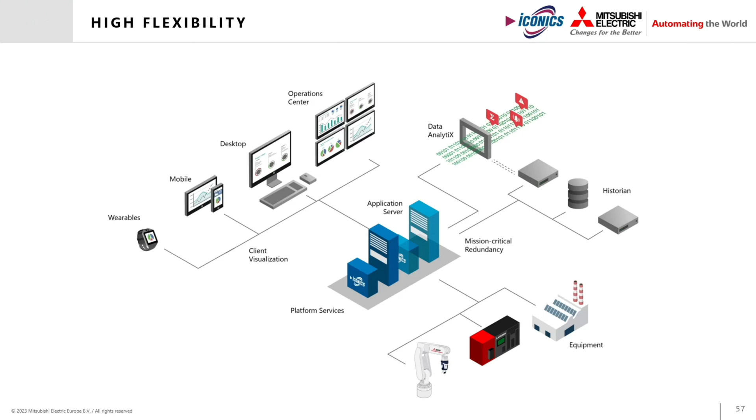We start calculating, we start doing some research, some analytics on those by defined rules, and then you see that on the top, we publish that information based on your self-defined rules and create value to your process by visualizing the information within a dashboard.

But let me use this graphic real quick because I want to introduce you to all kinds of possible spots where AI could happen in this picture.

For example, we see it down there in the robot itself, so we have embedded AI. There is an algorithm, there's intelligence within the product itself. It's from the vendor, from the manufacturer, from Mitsubishi Electric, for example. We will hear an example about this later by Anja.

Probably you will not have a single robot in your factory and throughout the world, so you cannot have a process of standing in front of the robot and waiting for a notification or something. So you need to collect this information and bring it to a centralized point, to a single point of truth, which is a platform.

A typical other smart factory AI spot is the edge, through edge computing itself. For example, a typical IoT gateway, which is located right next to a machine and taking care of several data streams. There could potentially also be several AI services on this IoT gateway to identify any issues, any problems, and send notifications again to the platform where you can collect all this information.

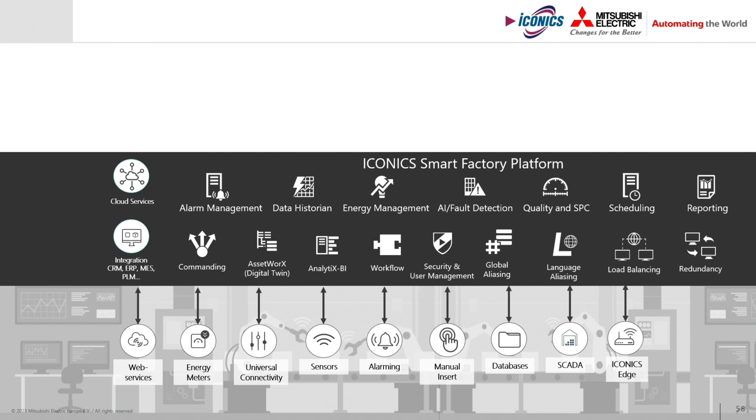On top of that, you design any kind of application. This could be an energy management application, that could be a fault detection, could be a quality management, whatever it is.

Plus, if it is a cloud solution, for example in Microsoft Azure, within a Microsoft Azure instance, there are other additional services that you can bring to the table. And all of this is something you have to do on your own, or you just use an off-the-shelf product for that, that is highly flexible.

So let me summarize that. There are millions of things, millions of data streams that you want to add at some point to your platform to manage your whole factory. With a solution, with the Smart Factory platform, you can shrink down the information to what is necessary. So we heard that in the past, connect to anything, receive all data. That might not be the solution for your application.

So you compromise that, and then there is a different environment where you can add calculations, add codes, add intelligence, and in the end you see your new insights on your dashboard, on your screen. The screen could look however you want it.

So I brought some examples with me. For example, for an iPad, for a tablet solution, where you want to add some further information about your energy generation process.

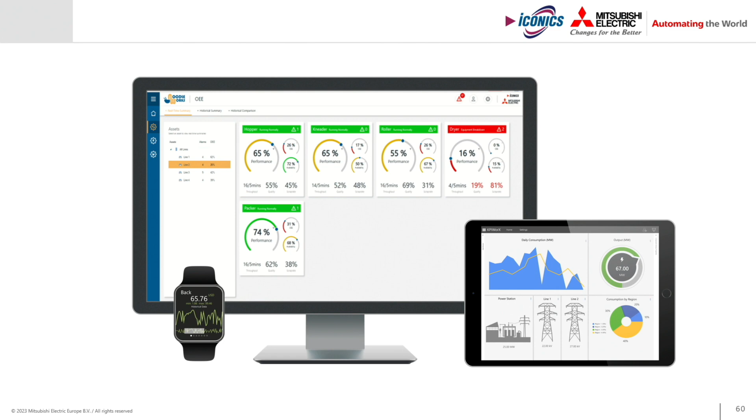We see it on the big screen on the monitor, where you want to compare all kinds of lines within your factory with each other. What is the performance of each line, and why is it different to other lines, even though it's almost the same? And you could also receive notifications on your watch if you're a service technician, when an AI algorithm detects that one of your equipment is about to break, telling you to go take care of it. It's all coming from a platform, a single point of truth.

I want to keep that short because I think all of you heard that with AI and data, you are capable of creating data-based processes. So as a self-service, you have fault detection, it improves your decisions, it reduces response times and waste, for example in operation costs, only by utilizing a dedicated platform.

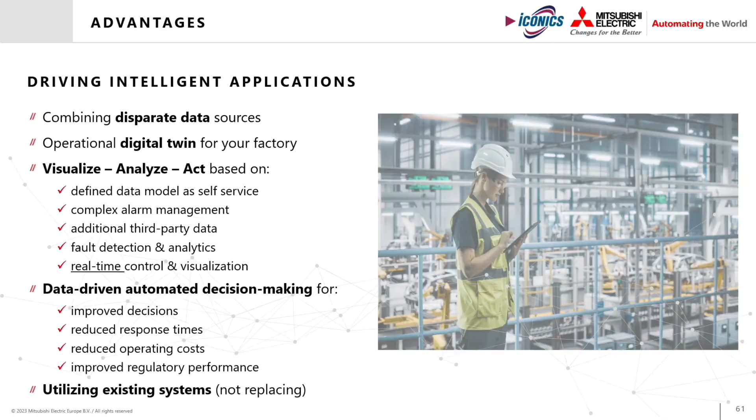Talking about the platform at this point, I want to hand the microphone over to my colleague Anja, because she wants to dive deeper into some examples within the Mitsubishi Electric Group. Thank you, Sebastian. As Sebastian already told you, I'm going to highlight some examples and also explain to you why we think that AI will exist on different levels in manufacturing areas.

If you think about old Hollywood movies, for example, where you have a supercomputer villain, an evil AI, and all robots that are evil, as soon as the supercomputer AI is destroyed, everything shuts down at once. I will tell you why in manufacturing this is not the way it's going to happen.

In reality, in the manufacturing area, we are all about milliseconds and nanoseconds. For example, when we are drilling a hole, we don't have the time to talk to the central cloud and wait until we get the answer. And even if it wasn't a problem with the reaction time, there's also the problem that servers cost a ton of money, and we simply want to save money.

The third reason why we think AI will be on all levels in the manufacturing area is simply also the security aspect. If you have a system that can be shut down completely by just one point attack, maybe you don't want this in reality, because your whole production line would stay still.

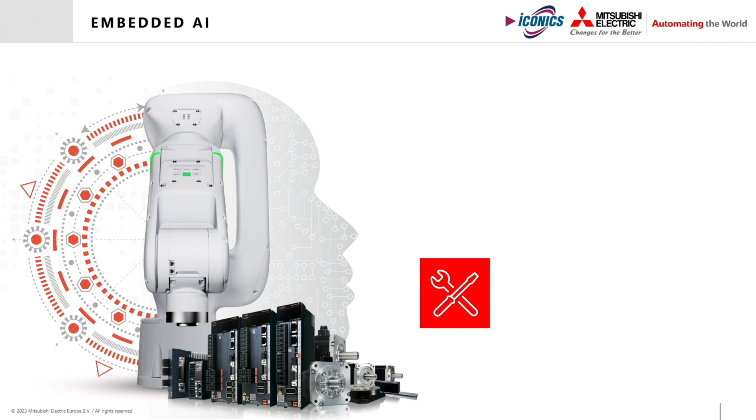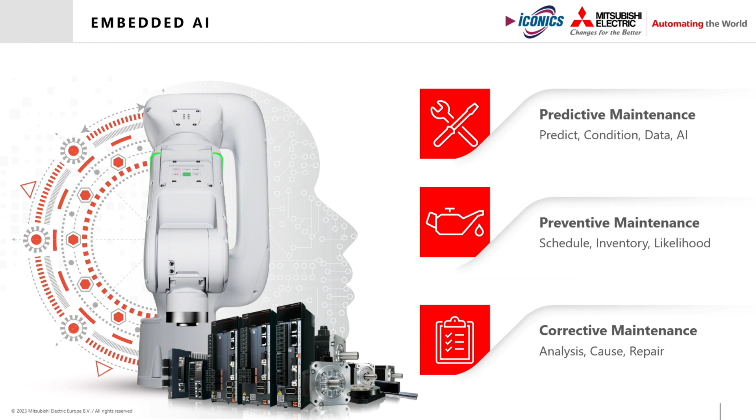And talking about our products, for example, you can see here on the picture we have AI already embedded into our servos, and because our servos are also in our robots, they also have embedded AI functionalities. You can see on the right side of this slide that we have, I would like to say, the common predictive maintenance, preventive maintenance, and corrective maintenance advantages by using this embedded AI.

But also you have to keep in mind that we are able to have real-time reaction, the possibility to react in real time with our AI embedded on the products. And also, the setup time of this AI is really short because there is no setup time. It is already embedded on the products, and therefore, as soon as you start the robot, the AI is working.

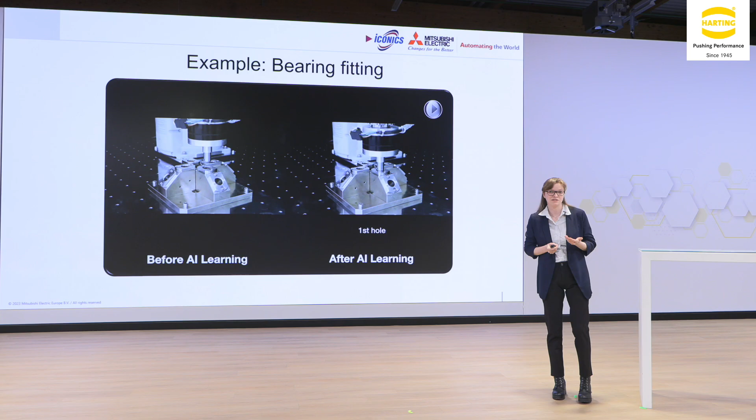And one of the main benefits that I will show you in a little video is that the AI teaches itself, so it improves the product and the processes. In this video, you can see on one side the robot with the bearing fitting before the AI learned, and on the other side after the AI learned. You can see that it was able to improve in time, and we all know that time is money, so the AI helps us save money in the end.

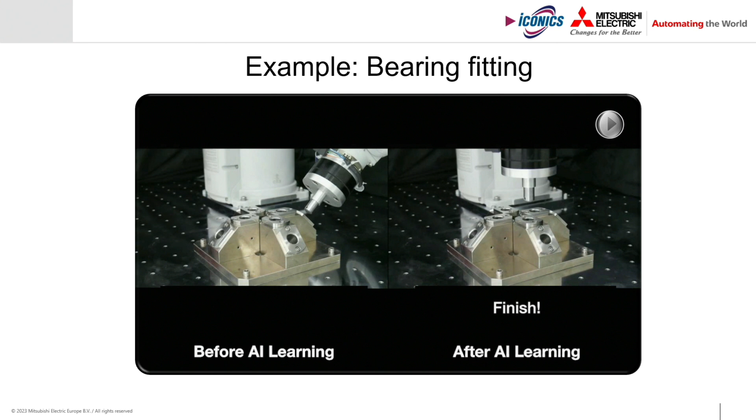So as you can see on the left side, it's still working. The other side is already finished.

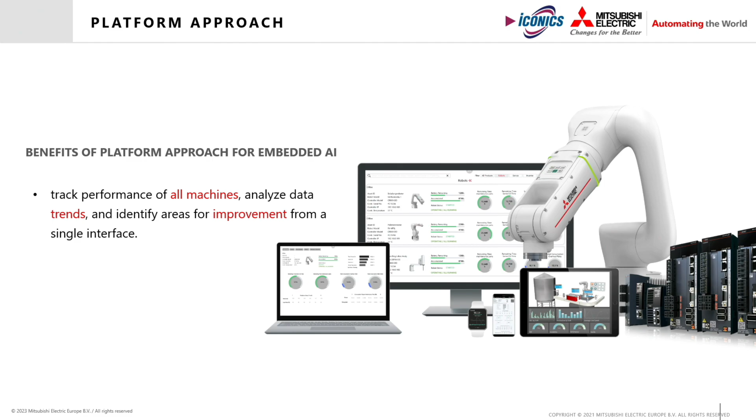Coming back to the point that we need a platform in the background to use all the benefits in the best way. You may wonder why you need the platform if your robot already has embedded AI. But it's simple: on the factory floor, we're not just looking at one robot. Most likely we have hundreds of robots, and you want to track the performance of all your machines, analyze data trends, and identify areas for improvement. At best, you want to do this using only one single interface. That's why it's important to have a platform in the background where you can gather all the data at a central point.

Now I'm coming to the next level of AI, which in this case is the edge level. I have an example for you, because nowadays we face some difficulties. The challenges of today are, for example, a shortage of labor, and older experienced workers going into retirement, so their skills and knowledge are lost. The new employees don't know what the data means or how to react to it. They don't know the processes as well, and they lack experience and intuition, so they don't know how to operate the machines or interpret the data they're given.

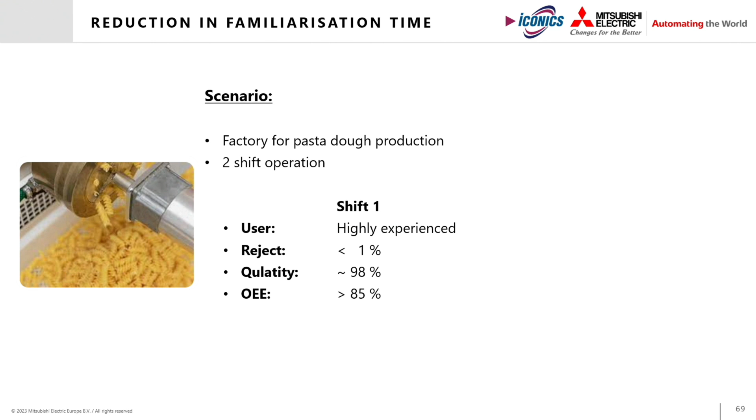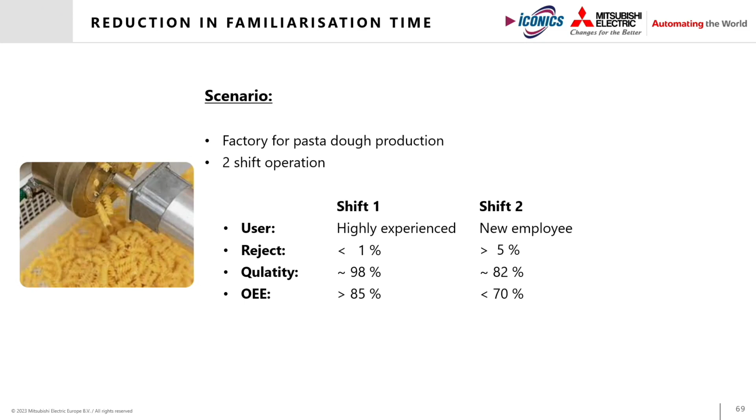I have a little example scenario for you. Think about a small factory for pasta dough creation that works in a two-shift operation. In the first shift, we have a highly experienced worker who creates good quality with only a few reject materials. In the second shift, we have a new employee who is not as experienced, so the quality of the product is a little lower, and he creates a bit more rejects. In this case, the operator of the machine has to determine the stirring time for the pasta dough.

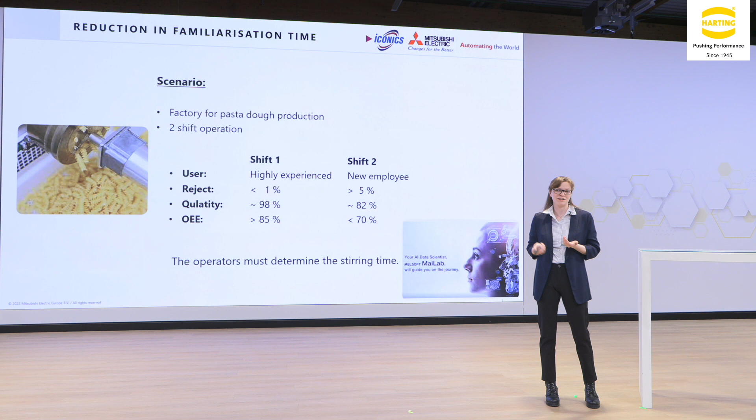Such a scenario is perfect for AI tools, like our AI tool MaiLab. If you want to use AI, you have to go through some solution steps. The first step is to set a goal. In our case with the pasta dough, the manager wants to keep the same KPIs as soon as possible. Then you have to think about the relevant data and read it into the system. For the pasta dough, we have wheat quantity, flour quality and quantity, humidity in the factory, and temperature—all these factors can change the outcome of the product.

Then you have to create an analysis model using AI and continuously analyze your data. This is where our software, MaiLab, comes into play, and then we're able to achieve the set goal. Here's a little overview of how MaiLab looks. You might think an AI software needs to be very complicated, but in our case that's not true—MaiLab is a very simple tool to use, and you don't need to be a data analyst to use it.

It guides you through the process by asking you some questions, for example, what is the purpose of your analysis, and what parameter you want to adjust—in our case, it's the kneading time for the pasta dough. Afterwards, MaiLab directly creates an AI algorithm, and if you like, you can adjust this algorithm, but normally it's completely fine to just stick with the AI-generated one. Then you get a result with visualization showing how good your data quality is, what parameters are affecting your outcome, and you can directly see what the perfect kneading time is in any situation—no matter the flour quality or the humidity in the factory floor, you will always have the perfect operating time for the new employee.

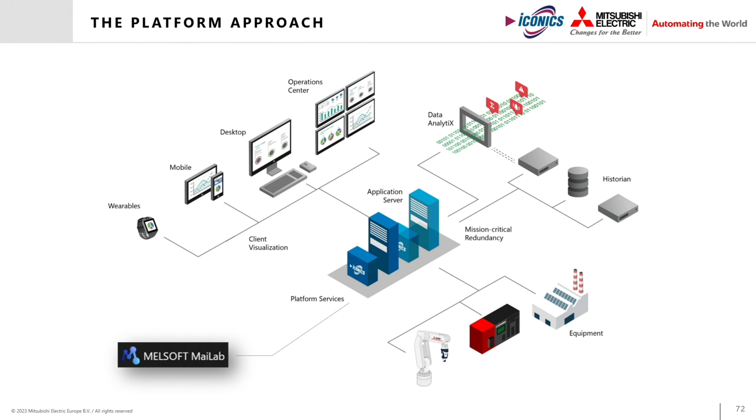Now also mentioning the last point, which is the way into the cloud. Of course, MaiLab is not only suitable for edge level AI, it's also possible to run MaiLab in the cloud if you like. And when we have third-party products and we are looking in the cloud, it's very important that we have one common platform in the background, because we need to think about security in the future. You may need to be able to versionize everything you are offering your customers, and therefore this common platform is needed.

In the end, our motivation, because we want to have AI on our products, is very simple. We want to stay competitive throughout Europe, in Germany, all over the world. We think this will only be possible in the future by using AI products, because nowadays nearly every country can provide good products, but the added value comes into place when we have AI on board and can optimize our processes even more with AI.

So, heading over back to Sebastian. Thank you, Anja. So, as we heard, IT and OT is growing together. We see that within our own company as well, otherwise we wouldn't have been acquired a few years ago. But let me summarize that we now saw two examples of embedded AI, which comes directly within the product.

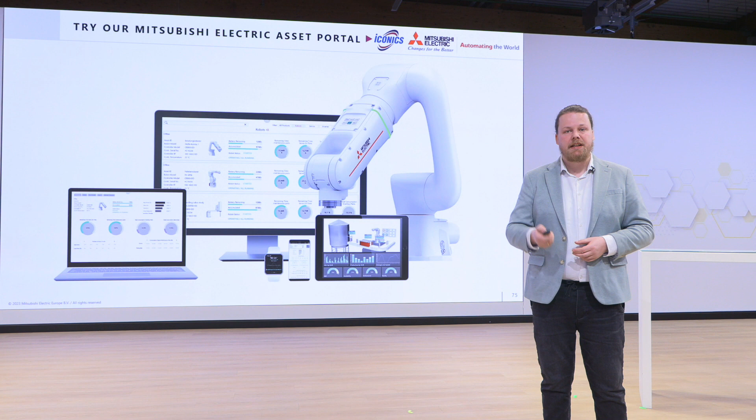Last but not least, I just want to highlight three use cases that you might want to check. First, FLSmidth in the mining industry, with a crusher, they have a predictive maintenance use case. Another use case is at Tefal, about energy analytics. And last but not least, a Microsoft use case, because they are connecting their buildings, and what they do is have downtime prevention by collecting alarms and then calculating what is the worst error and where they have to start to lose less money.

Thank you, Sebastian. Thank you so much. It was a pleasure. Anja, thank you very much. Come on stage, please. I have one very short question, because when it comes to AI, we need to discuss the AI Act and certification apps and ops.

In my opinion, the platform is a standard for certification apps for the future when we talk about the AI Act. Or am I wrong? No, I would say you're completely right. Yeah, we need one platform in the background to also ensure that the certification is handed down to all the products that need it.

Yeah, absolutely. And you mentioned the Security Cyber Resilience Act is also coming in the next 36 months or something, a very important topic, I think. Yes. And a lot of machine building companies are, in my opinion, not realizing what is coming there. Yeah, we have to speed up a little on this. In general, I think not us as Mitsubishi Electric, but the whole branch.